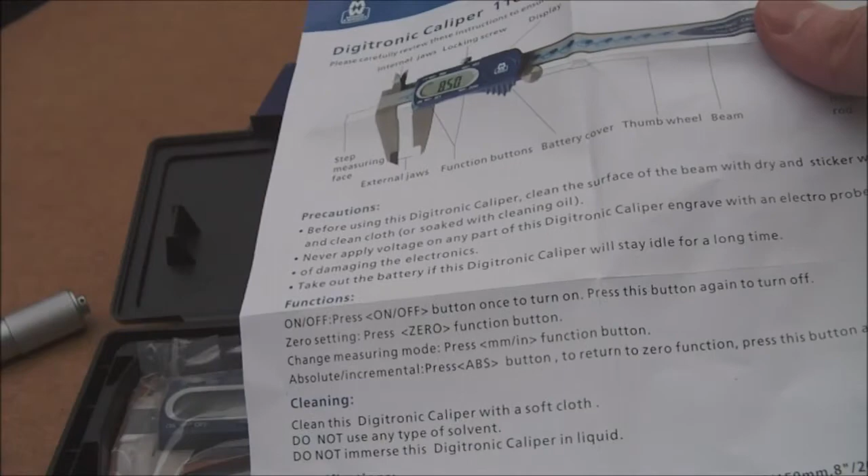So as I've tested the instrument, let me just put this under here so it doesn't blow away, just have a quick scan over the instructions.

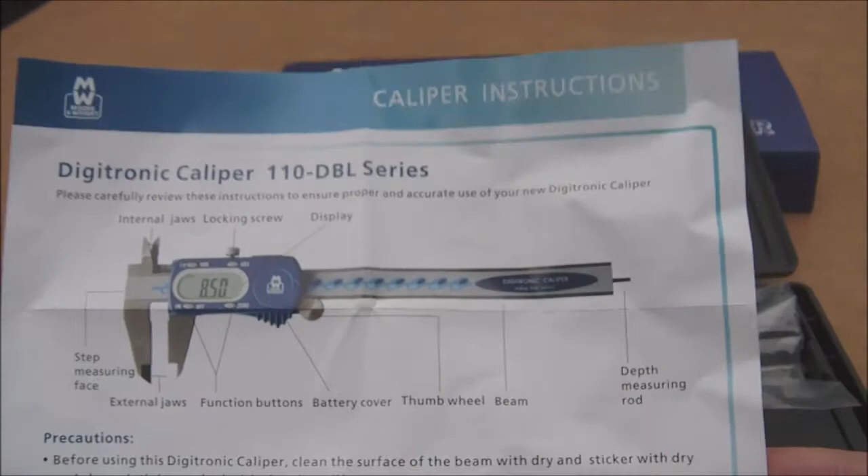As you can see, it's the 110 DBL series. You can see Digitronic there, and they do put value line, I think, on the shaft as well. So just your basic instructions really.

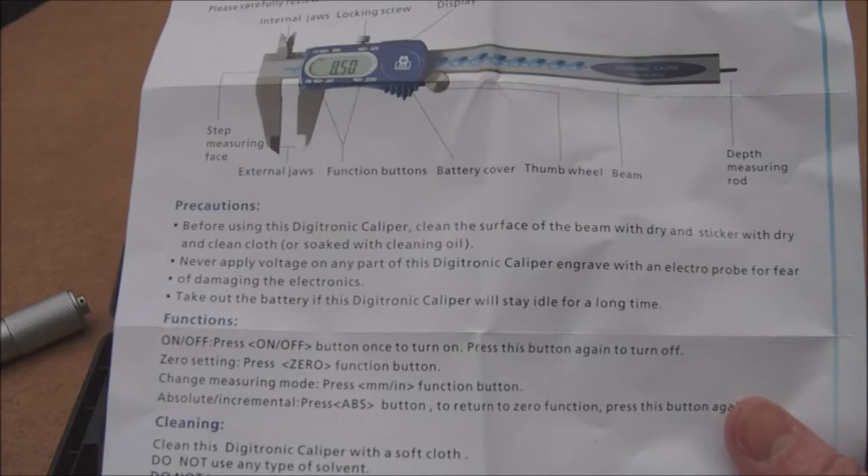It does say about cleaning, you know, clean with a soft cloth. Don't use any solvents, so no alcohols or anything like that. Do not immerse the Digitronic caliper in liquid, so don't douse it in WD-40 or anything like that if you want to clean it, which would affect the roller and things like that, I suppose, inside the measuring equipment. And you can see the wind is picking up, like I said.

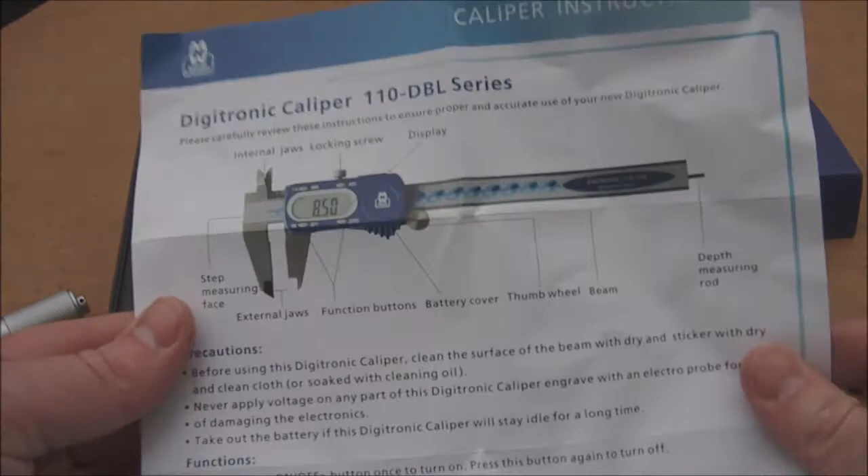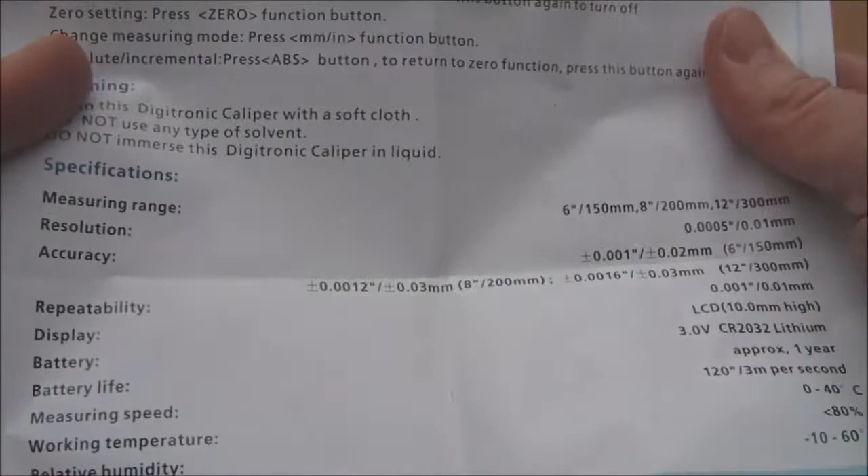We do want to get this done as quickly as we can. You just got basic specifications there. It does say the accuracy on the accuracy there, you can see.

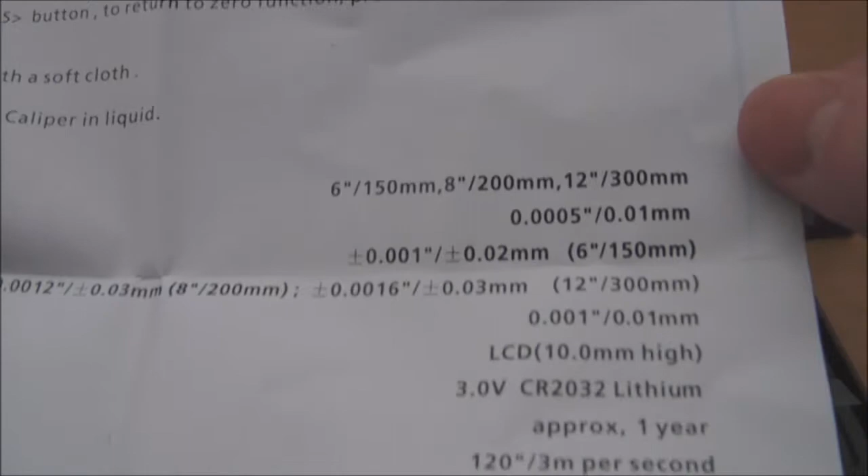See that up close. The resolution is 0.01 millimeters.

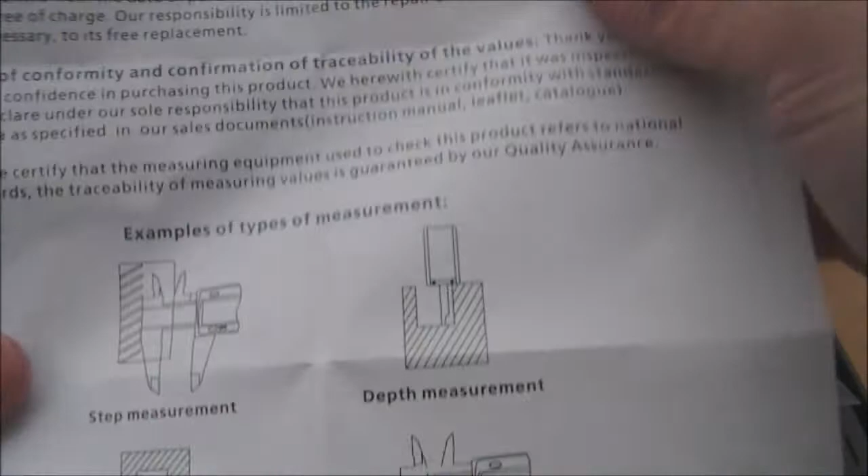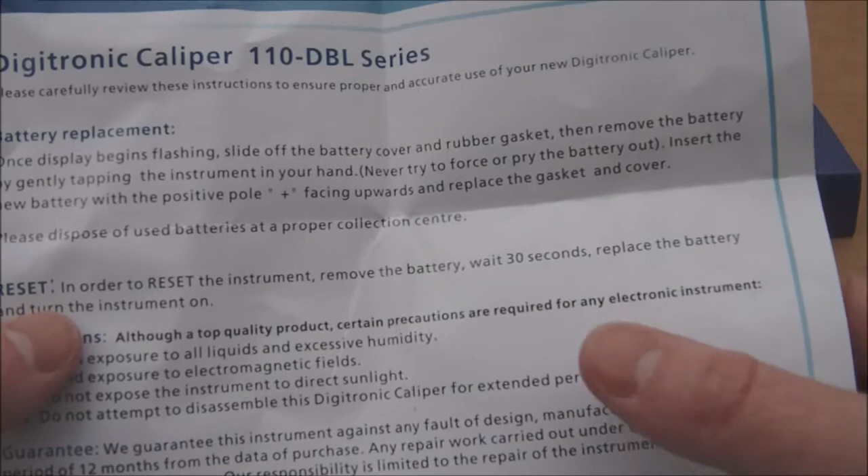You see again on the other side just your basic instructions about your battery. We'll get to that in a minute, I'll show you the battery replacement. It says when you want to reset the caliper, you have to remove the battery, then wait 30 seconds before replacing the new battery and turning it back on, or obviously putting the same battery back in again.

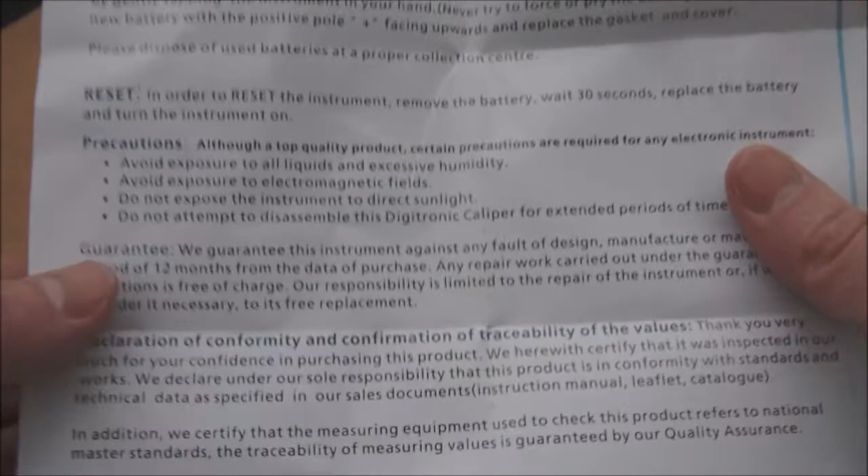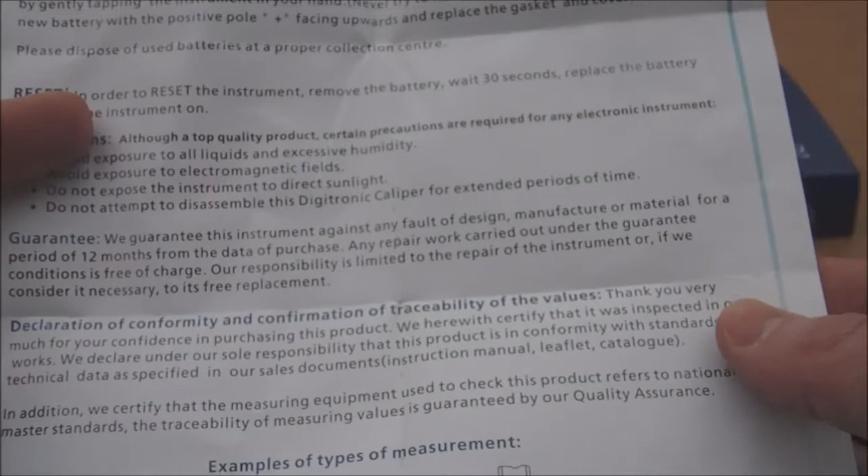So it talks about an important bit you'll read off the back, the guarantee. We guarantee this instrument against any fault of design, manufacture or material for a period of 12 months from the date of purchase. Any repair work carried out under the guarantee conditions is free of charge, so they might repair the item and not actually replace it. Our responsibility is limited to the repair of the instrument, or if we consider it necessary, to its free replacement. So they could just replace it, or they might just repair the current one.

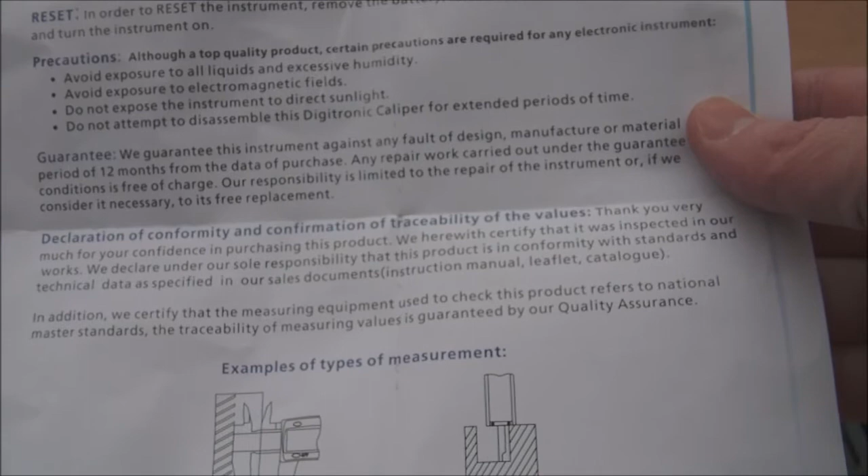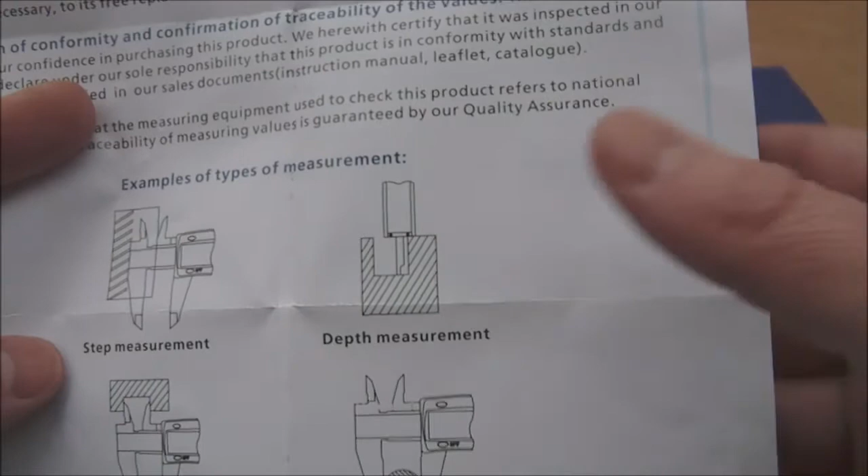And there we go. So there's a little bit of declaration of conformity, traceability of the values, information there, and you've just got your examples of measurement for the caliper, which is as we're used to. So you've got your inside and outside, or the internal and outside, and you've got your depth on the end of the instrument, and your step measurement as well.

So again, I'll just put this under here so it doesn't blow away. We can lift this up a bit at a slight angle.

Now, when you look in the actual case, the caliper does actually come in a plastic, call it like a little plastic sealable baggie. It's a rather long baggie there, and it does have this kind of little cardboard thing in there to kind of protect the caliper from being knocked about in storage.

Now I will say the unit does come with 2 batteries. There's one already in the unit, and there's one that comes on a little cardboard cutout tab. The battery that was in the unit was actually depleted when I got it, so it's the shelf life. That's something to remember. When you've got the battery in the actual unit sat there, its shelf life will deplete over time, so that's obviously been stored in a shop or something for a while and it depleted.

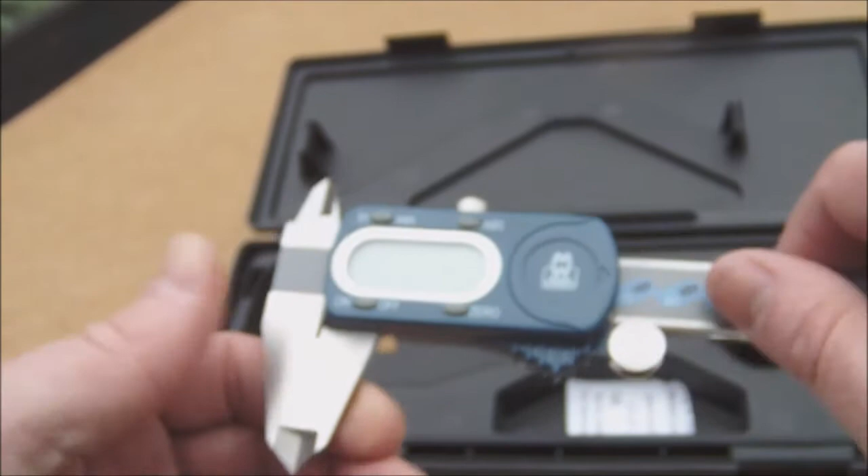But to turn the item on, you do have to kind of hold it down. I've noticed with the buttons on here, you can't just lightly press them and they'll do what they want. Sometimes you do have to give them a firm push. So I'll just clean them, make sure the jaws are clean. There we go, it's 0. Don't really need to zero it, but you know, your zero button is here.

And I'll be honest that the feel of this is a lot better than some of the import Chinese models that you get. But I will be honest, my Chinese import vernier, I've tested them against each other, and the Chinese one is very accurate, and it's almost pretty much bang on identical when measuring the same items. So I've not really got a problem with my import one. Like I said, that was a very good import one example, and I probably will do a video on that before long, probably comparing it with this.

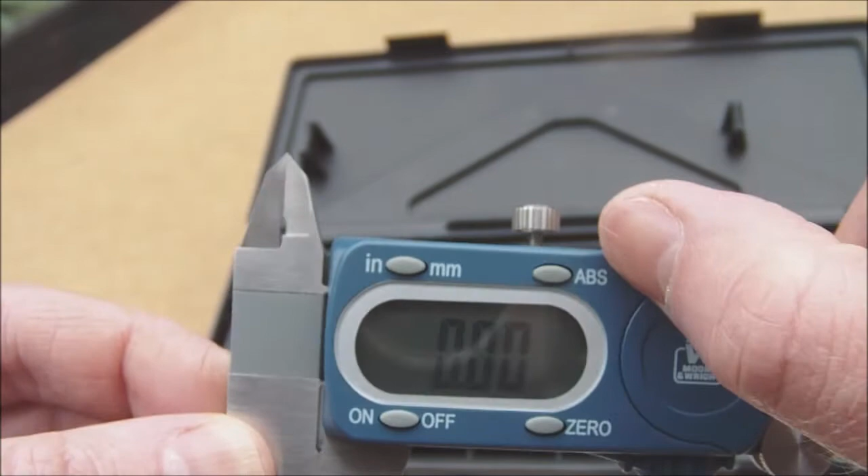So you've got absolute on there, as you can see the ABS button there. You've got your usual top lock. I know a lot of people like to shore up the feel of it by tightening it up a bit more to make it feel more stable, but you've got to be careful because it will score along the top of the track if you're not careful.

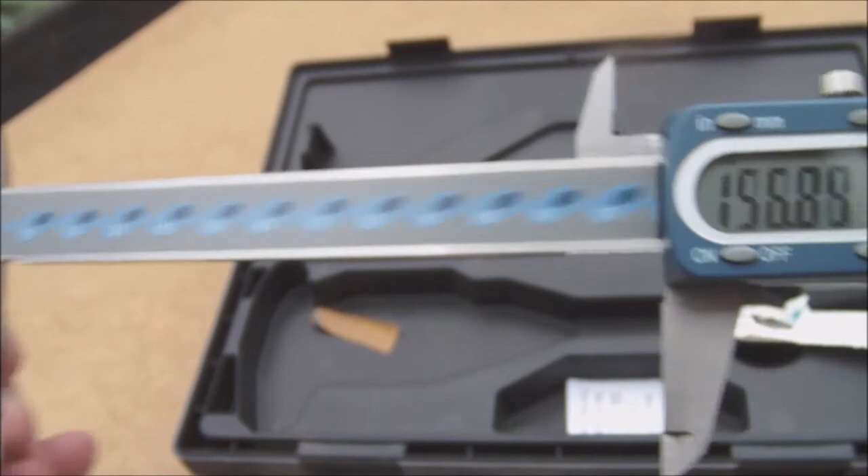So I'd loosen it back. Just use your thumb on the wheel or the slider there. You can see, bring it back and back. Still 0. Quick slide all the way back. Sometimes you might get a slight error. It's all the way, yep, and it's still on 0. So that's bang on. Sometimes you get a slight error and you'll see 0.02 or 0.01 with a caliper, but that's bang on.

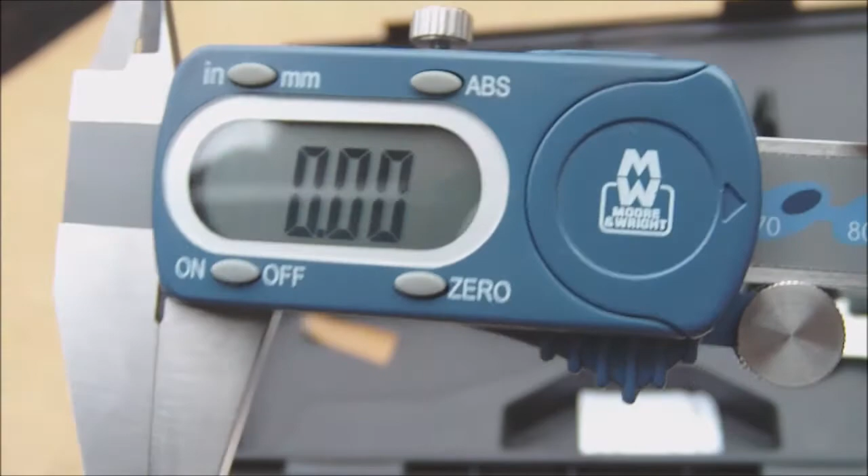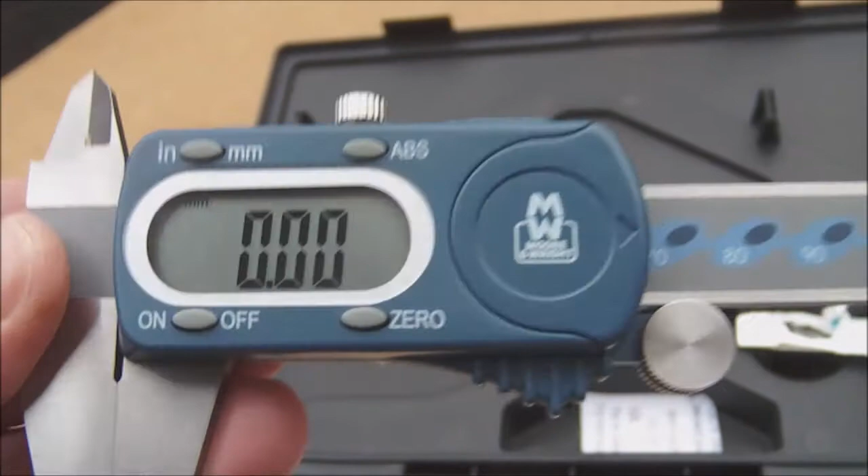You want to take a look at the actual unit up close. You can see the only Moore and Wright logo on this is on the actual battery cover. So if you do lose that battery cover, you'd have to put a little bit of duct tape or something over there to keep the battery in place, which people will do - they're not going to throw away a digital caliper that's perfectly alright just because the battery cap is missing. And when they do come loose, you get slight knocks and bumps. The only difference then is that it just looks like a basic caliper, because unless people know the Digitronic brand name, they're not really going to know it's a decent brand.

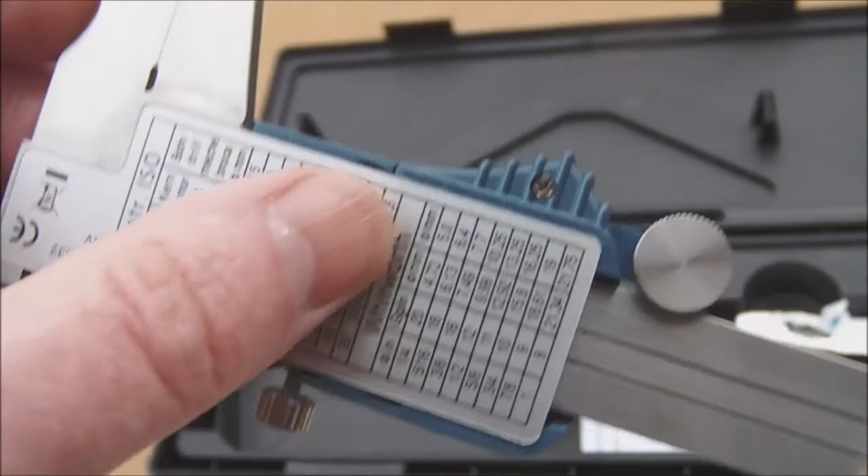It's not that it's a Moore and Wright, because that's the only label you've got. Turn it over and you've got the usual sticker. You've got your metric, ISO and Whitworth, and you've got all that information there, what you're used to having even on the import calipers.

If we take a look and try to get some kind of a gauge of the actual edges - like I say, don't tighten it. I personally don't like to tighten it down a slight bit to have it more stable on a caliper, because you can scratch and scar the top end, and a lot of people like to do that. Even seasoned engineers do that, but it's not for me, to be honest.

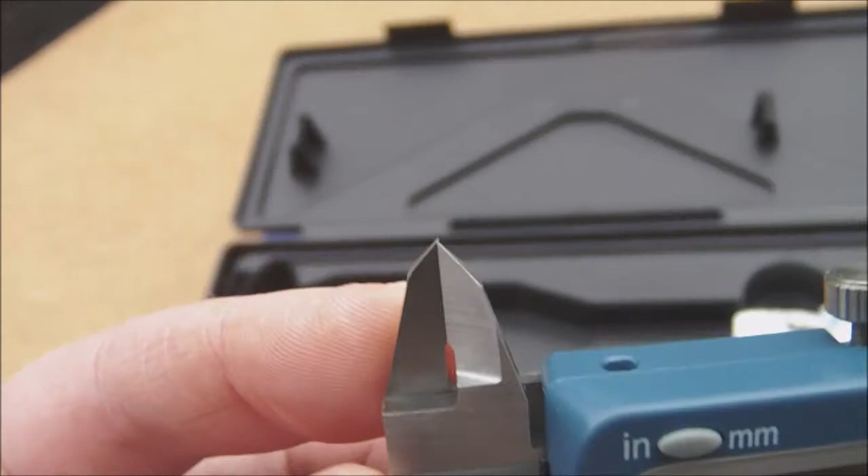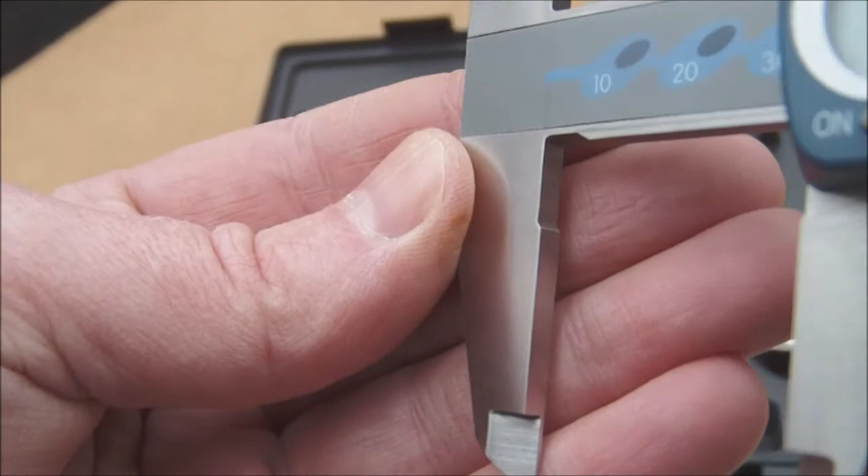If you have a look at the internal jaws, there we go. Have a look at the external. So I put my hand at the back because that helps the camera focus in - it's not focusing, it focuses on the object and not what's behind it.

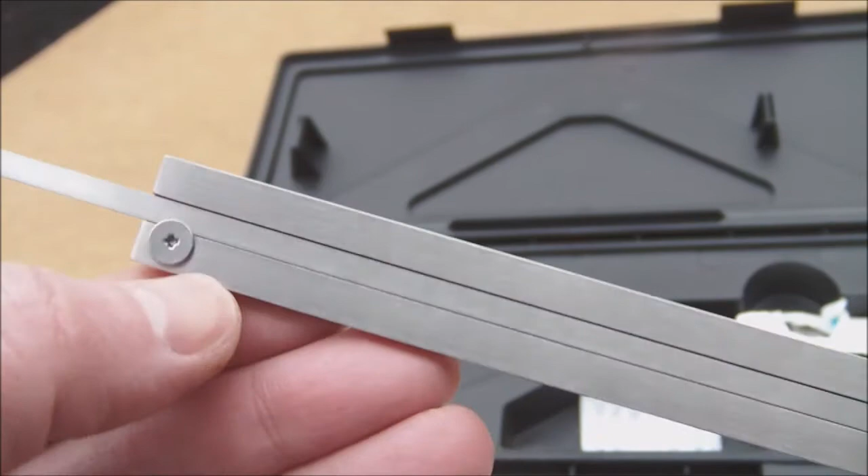There's your depth end - measure your depth on there. It's a slightly shorter tang cut into it. A lot of them, that tang comes down a bit longer and then right angles off, but that one's quite short - it'll still do the job though.

If we can move it out and take a look at the actual slide. And that is actually very clean - you can see a lot of the import ones are very dirty and black. You can see it's a high quality instrument there, straight off the bat. You can see that there.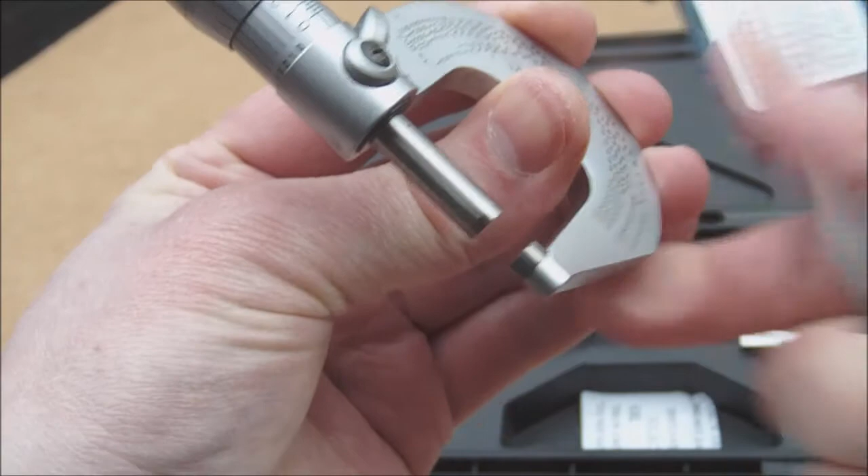I'm going to set this, probably set this mic to 1/4 of an inch. We'll see what we get. Well, 1/4 of an inch - this is being zeroed, but I don't know if we'll be able to. Might have to switch this around to be able to get it in there this way around.

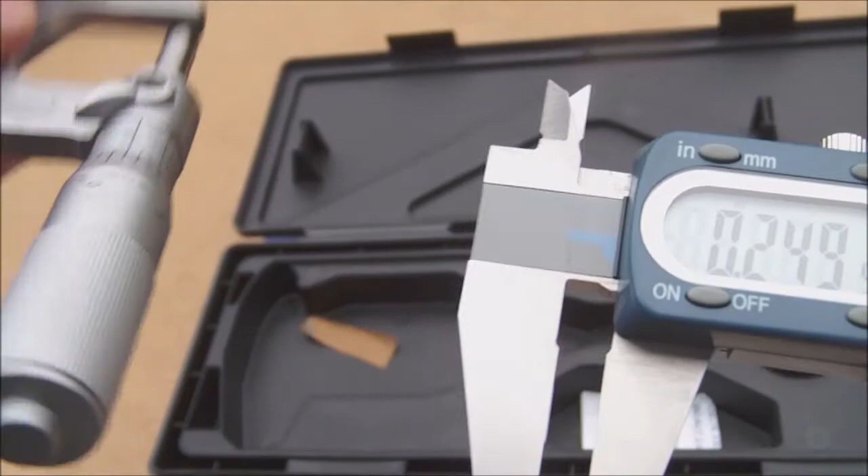So can we take a look at that? So that's 1/4 of an inch - 0.2495. It's supposed to be 0.250, but I think that's, you know, it's a bit awkward. What if I've knocked it anyway? I think the mic slipped just slightly. So can we do it like that? Let's try it again.

There we go, 0.250. So he's relatively... and it's a Mitutoyo mic, so it's a decent mic.

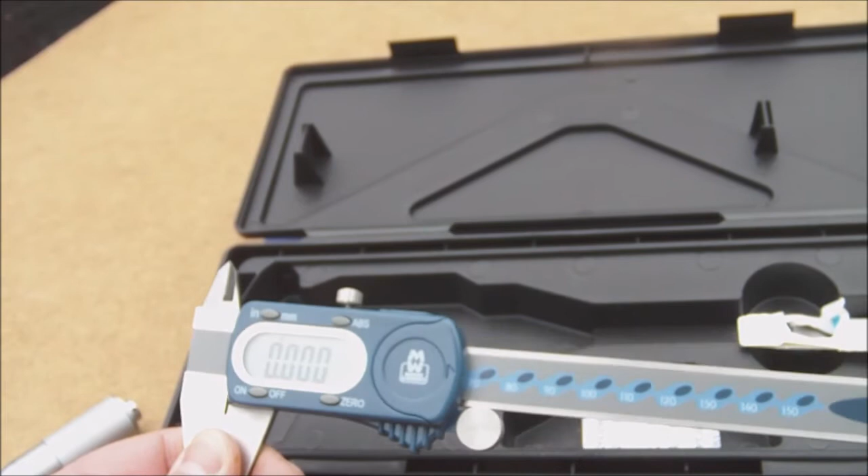Let's see that. It is zeroed well. Obviously I haven't got any gauge blocks, but that's as best as we can take for the test of the accuracy against a mic. Obviously a mic is a lot more accurate than a caliper, so it's better than testing it against another caliper, especially an import one. For a higher quality brand like this, if this one's better than an import caliper, you wouldn't really be surprised.

And if it's pretty much the same, you'd probably think, why should I pay more money for the better one? Obviously the companies are going to take you more seriously with the better one, even though I would still use and bring the import one. Say with machining, use it for roughing out, rough cuts, even though I think it's still accurate enough. You can use that one as a bit of a beater for rough cuts, and then you've always got your decent branded one there so you can be taken seriously in what you're doing. You've got a good decent brand to be trusted with.

Like I say, you've got your ABS on there. Obviously digital calipers are a lot better than buying manual calipers, because you'd have to spend money on one in imperial and one in metric. This one is obviously 2 in 1 as a digital instrument, and you won't have to buy 2 calipers.

Back in the day that was a problem, because the manual readout calipers were still pretty expensive from decent brands, Mitutoyo and Moore and Wright, maybe Starrett as well. Starrett was a good brand, but it wasn't as trusted in the UK, because Moore and Wright and Mitutoyo were kind of, and still are, the industry standard here when it comes to engineering.

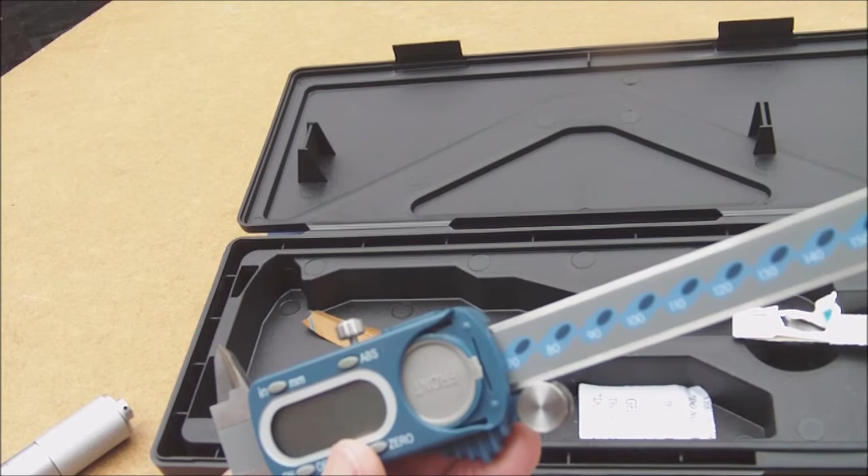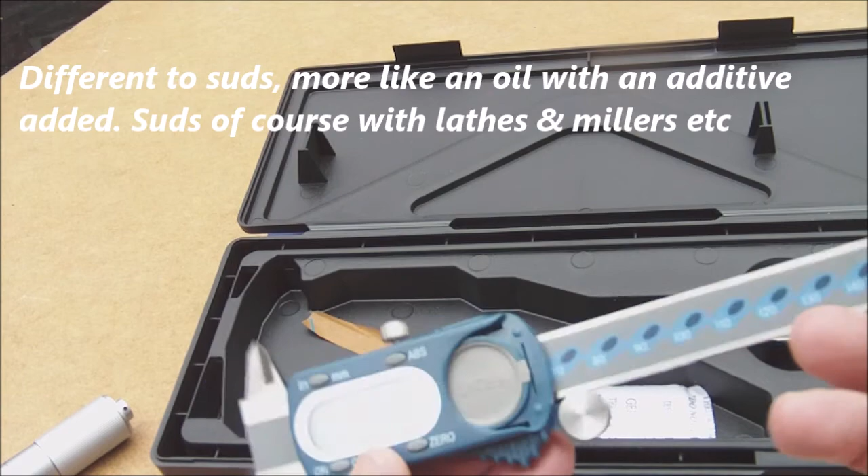Some additives, you know, like the stuff you used to get with the Wickman Auto single and multi spindles and things like that, where you'd get the additive in there. It stops that splash getting through to the battery inside and damaging it, because you get it all on your hands when using your instrument. Most of them don't bother having that waterproof barrier, so that's a good feature.

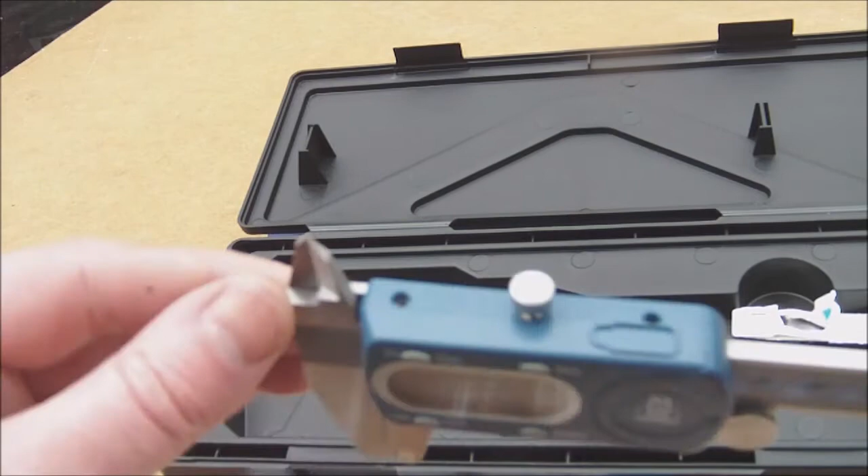I don't know, maybe a lot of other brands have got that. There isn't, to me, any digital output port. It looks like there was one moulded, but it was omitted from there. Whether they do another version with this same moulding that actually has a port put on that version or not, I'm unsure, but it looks like they did decide to put a port maybe on there, and they decided not to on this model. Whether they decided to omit it from all the series, I'm not sure, but it looks like it was thought about and it's just been left blank.

That's basically it. If you look at the roller, that's what the roller looks like. Yeah, that's basically your Moore & Wright 1110 DBL digital caliper.

It's quite a nice unit for the price. The cost isn't that high that you would expect. Obviously it's more than, say, the import - probably 2 or 3 times as much as what the import calipers are going to cost you. But it's a higher quality unit, and it's a respected brand in the industry.

It'd be perfect for, you know, a serious apprentice. Although I would suggest an apprentice, especially one that's just at college at the time being, would probably get away fine with a decent, and I mean decent, import caliper. But this would be fine too, because like I say, you've got micrometers anyway, and depending on what you're machining, if you're going to be a precision engineer, you're going to want it to be precision anyway, aren't you? So micrometers are more reliable for absolute accuracy than a caliper.

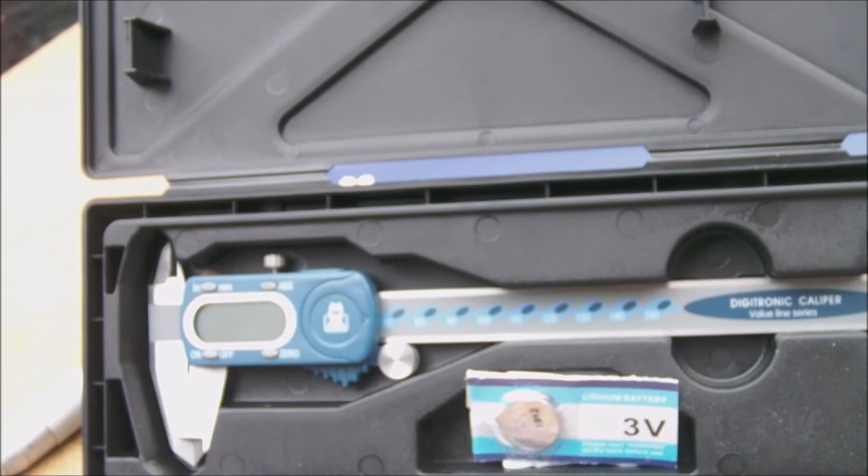It's not overly expensive. If you're getting into studying engineering and you want your parents to treat you to one for your birthday - I'd say Christmas, but that's just gone - for your birthday, or just as a gift because they're pleased that you're bothering to study something, then it wouldn't make a bad purchase at all, and you could carry that on with this one.

Obviously you could carry that on into work and use it fine, whereas the import one you'd probably just keep around for a beater or for rough cuts when machining and things like that. Whereas this one, you can carry this through into your career. So that's the Moore & Wright Digitronic Caliper, otherwise maybe known as the Value Line series, because they have got that on there - the DBL 1110.